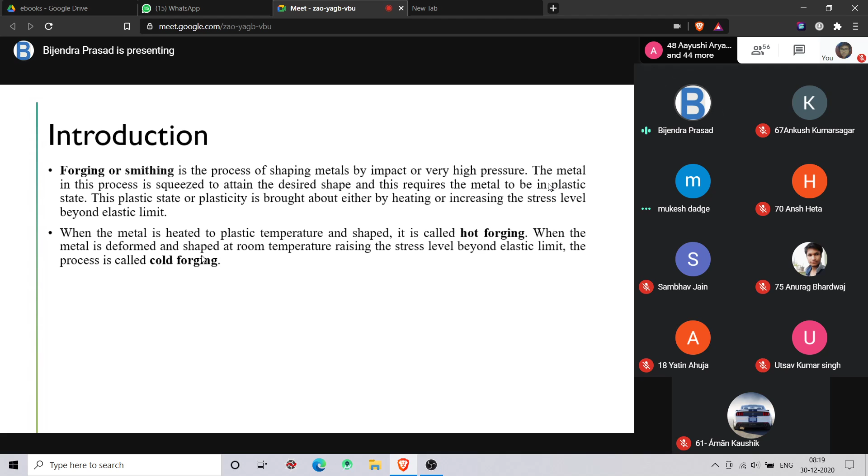Cold forging is used for very soft materials like aluminium, or when we want to do very little amount of deformation, then cold forging is applied.

Now this is the main classification of forging. One is open die forging, and the other is closed die or impression forging, also known as impression forging.

As you can see in these two images, these are examples of open die forging. These metallic parts, the lower and upper, are the dies. So these two metallic parts are known as die, used to give a desired shape.

We apply pressure as well as give the shape. So in this open die forging, the die is actually open, with two flat parallel faces, and between those faces the object is placed and pressure applied to give the desired shape. The material is free to flow in any direction - that is the main property of open die forging.

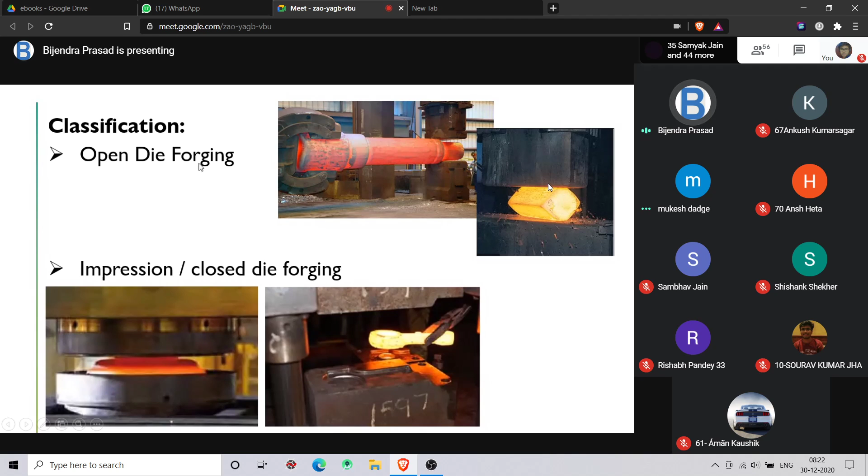So open die forging is performed between two flat dies, like I showed previously, and there is no pre-cut profile, no predetermined shape. The material is free to flow in all directions when you compress it in thickness or width.

Here the parts are of very large size, in weight as well as length - you can see 200,000 pounds and 80 feet in length. It can be hammered or pressed into shape. As the size is very large, the components produced will be less, and it is used where the size of the component is too large.

This is the schematic diagram. You can see the upper die, the lower die, pressure applied from above, and this is the billet - the heated raw material known as billet, which is pressed to get the final shape.

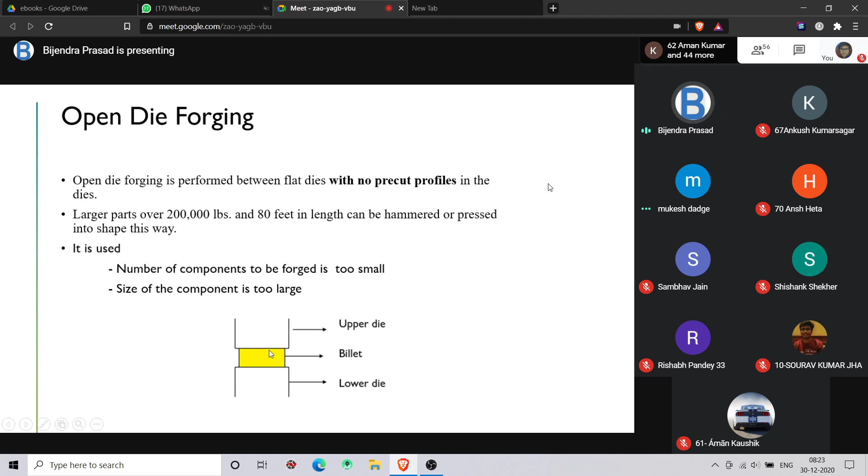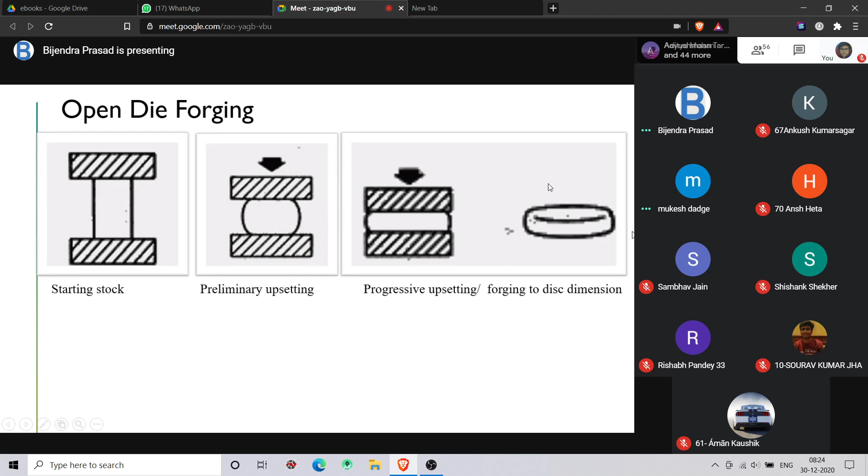This diagram shows the complete process. Initially the starting stock was cylindrical, placed between the upper die and lower die. When pressure is applied, this is the preliminary upsetting process - we will learn about upsetting in coming slides. With progressive upsetting, the final dimension is achieved as the final product.

Now, impression or closed die forging - as already shown in the images, it contains a pre-cut profile of the desired part, and has very close tolerances. You can achieve required dimensions compared to open die forging, where material flows freely in all dimensions. Here the flow is restricted up to a certain limit, so you can achieve very accurate or precise dimensional accuracy.

Now, because this is a closed die, size is restricted. Very large sizes cannot be used here. Only up to 60,000 pounds is used right now.

In impression die forging, two dies are brought together with the workpiece which undergoes plastic deformation. This is a very important point - all the deformation that is occurring is in the plastic state of the material, not in the elastic range.

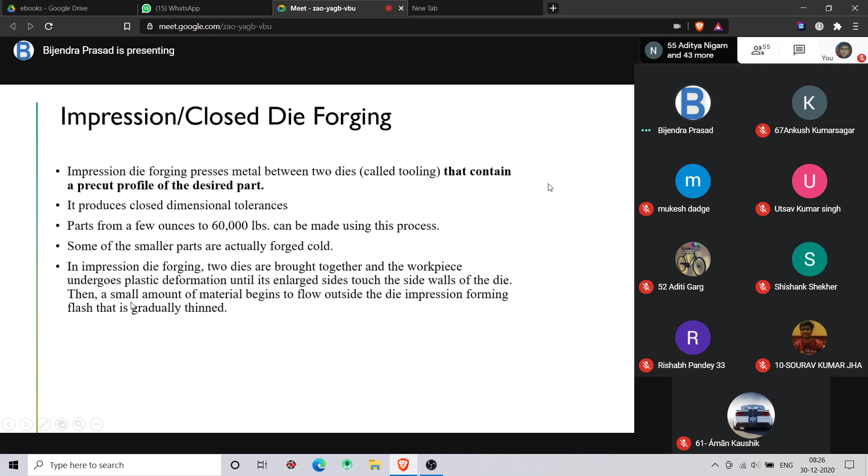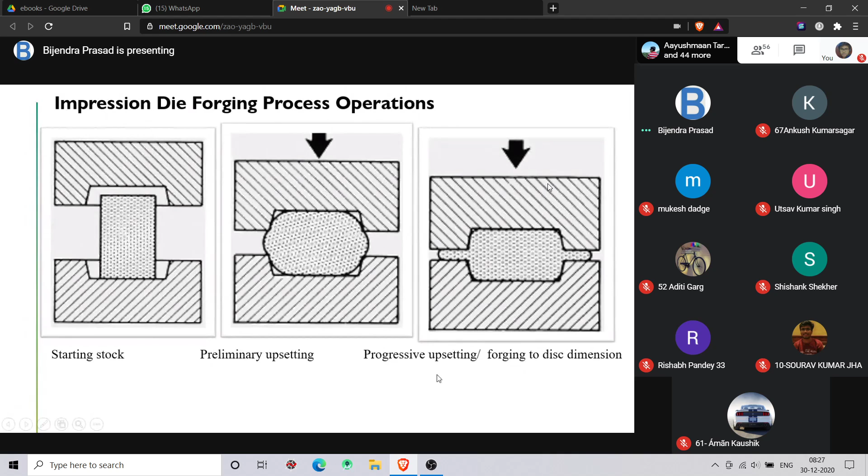Now, what materials do we use in forging? To learn about forging materials, we should know about forgeability - the ability of a material to get forged. Every material cannot be forged; not all metals are forgeable. So what property decides that a material can be forged? It is the ductility of the material.

What is the opposite of ductility? Brittleness. So ductility is a property where a material can be made to stretch without breaking, up to a certain limit.

Where ductility is high, ductility and forgeability are directly related - forgeability will increase as ductility increases with temperature, up to the point at which a second phase appears. After that critical temperature, the microstructure changes, so we won't go into that deep.

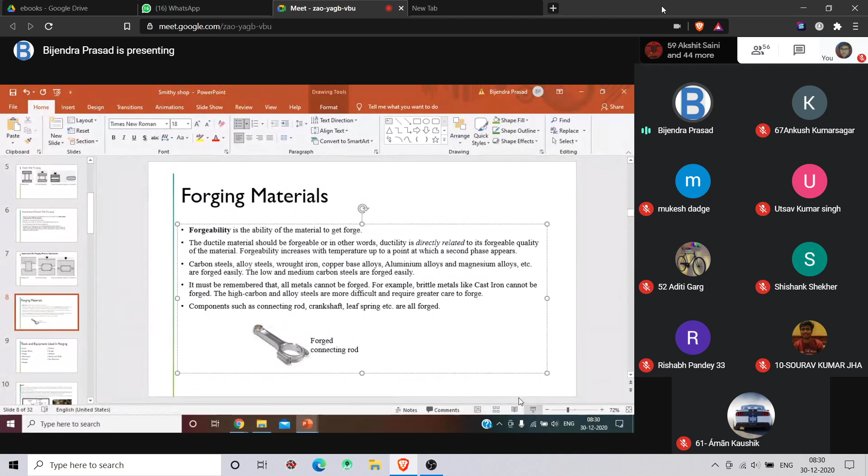These are the metals that can be very easily forged - carbon steels, alloys. You must remember 2 or 3 names from this for Viva purposes. Not all metals can be forged; brittle metals like cast iron cannot be forged because it will break when hammered. Forging is a process where you continuously need to hammer or apply pressure using mechanical presses.

High carbon steels and alloy steels are also brittle in nature and very difficult to forge. Low and medium carbon steels, where carbon content is low, are easy to forge, but at high carbon stages it becomes difficult.

Various components produced in industries include the connecting rod, used in IC engines to transmit power from the piston to the crankshaft, which is finally connected to the wheels. Then there's the crankshaft, another part used in automobiles, and the leaf spring.

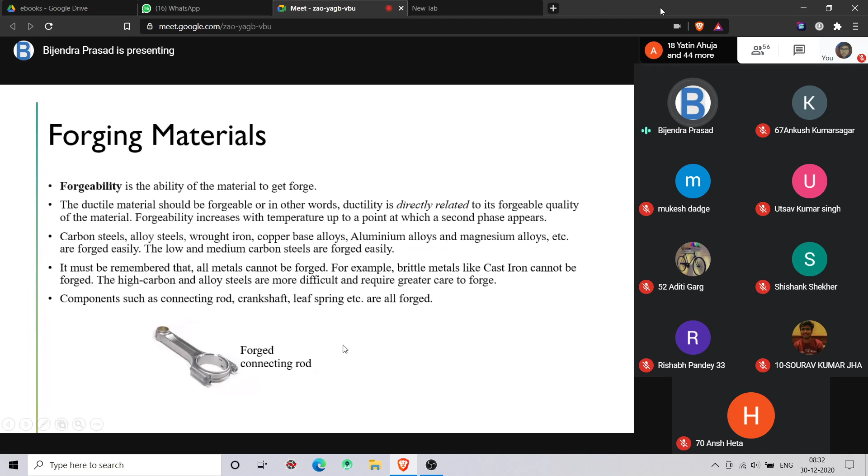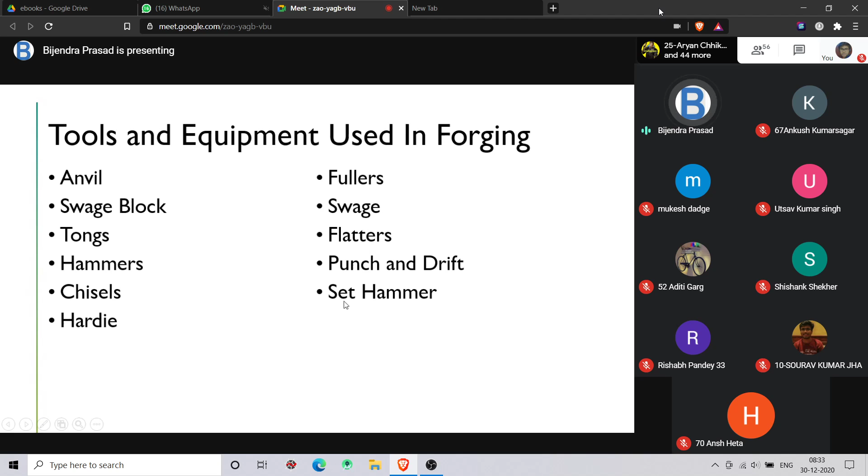Now we will discuss the various tools and equipment that we use in forging, like anvil, swage block, tongs, hammers, chisels, hardie, fullers, swage, flatters, punch and drift, and set hammers. So we'll go through all of these one by one.

So anvil is a tool you must have seen at various places where blacksmiths use this very commonly. So the front part of this anvil, this is actually a supporting device. When you are hammering, you use this as the supporting tool.

There are also some provisions in this anvil which may help you in deforming the material into a very specific shape. There is a square hole known as the hardie hole, and this is a square hole. This is a pritchel, which is a circular hole, and then you have this beak or horn where you can shape the circular curvature. Various operations that we perform are performed on the anvil.

It is made of wrought iron or mild steel. This material is made of mild steel or wrought iron. Now a tool steel plate is welded on top of the body to protect it, basically from the hammering process.

Now the front portion is known as the horn or beak. It is used for bending or forming curved shapes where we need to curve. Suppose if we wanted to bend this rod, we would place it here, and then apply pressure. It will bend.

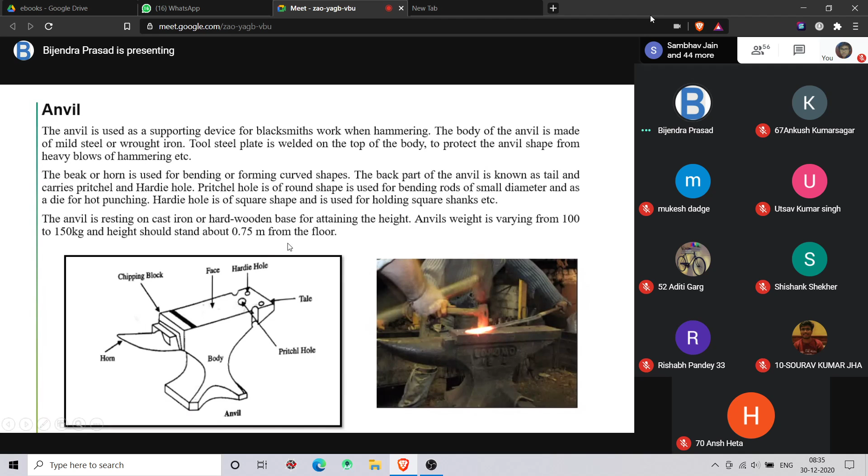Another tool that we use is the swage block. Swage block is generally made of cast iron, and it has, you can see, predetermined shapes like square, rectangle, circular, half round grooves, maybe roofed or some trapezoidal like shapes. These are all used to give some specific shape to our raw material. Suppose you want to give a proper circular shape, you can place it, rotate it, and apply pressure. Or if you want to give some shape like a flat shape, or a trapezoidal shape, you can use it there.

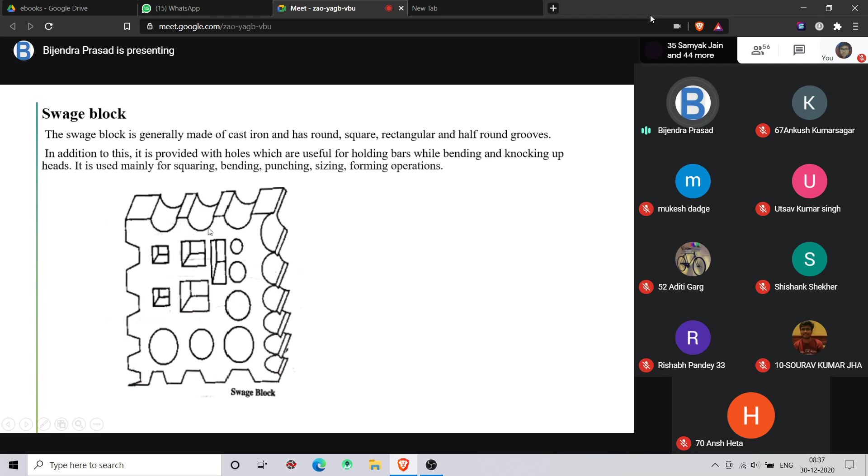So swage block is useful for holding bars while bending and knocking up heads, like when you are preparing nails and need to knock up the heads. It is used mainly for squaring - when you want to make the cross section square, for bending, punching operations, sizing, or any forming operations. So swage block is very useful in that case.

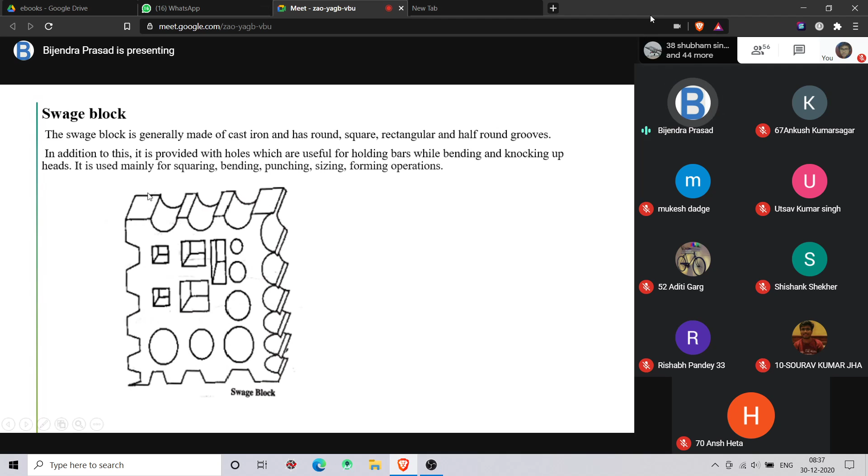Now tongs. Tongs is a very important tool that we use because it is used for gripping and holding material which is at very high temperatures - we cannot hold it directly with hand, obviously. Even when using it at cold temperatures, we need to use tongs, because a very huge pressure is applied while hammering. So to make it stable and give proper gripping, we use various types of tongs.

Now, on the basis of application, various types of tongs are used. As you can see here, this is a flat tong. Flat tong is used where we use flat plates, flat objects, which are not very large in size, but small, not very thick and not very huge in length. This is used flat tong.

Now flat mouth tong is used for longer flat objects. This is also known as two-sided supporting tong, because one support is getting from here and another from this end. So it's two-sided support of flat mouth tong.

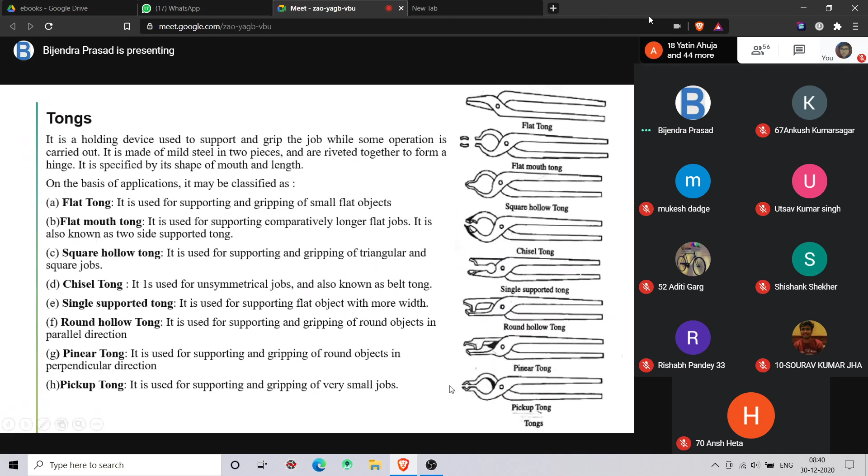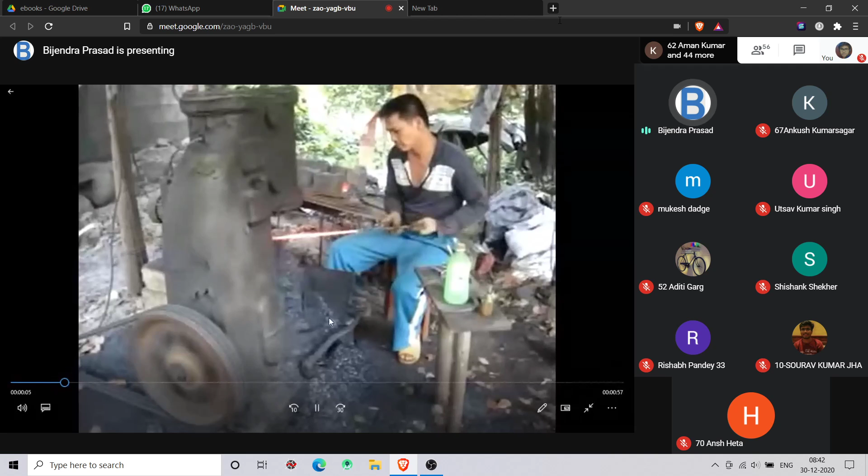This is power hammer. You can see in this video. Now this person is producing a boat nail made from this rod. Now you can see this is a hammer.

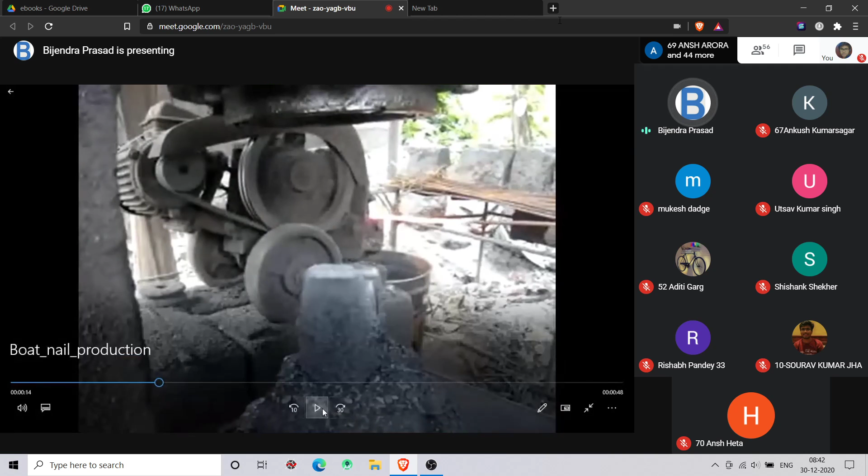Is this video? You can see this video. Yes, sir. Yes, sir. Yes, sir. Yes, sir. Okay.

Now this should not be misunderstood as the press, because press applies continuous pressure, but this is intermittent pressure, like hammering. This is a hammering process. This is a power hammer. Don't get confused with the presses.

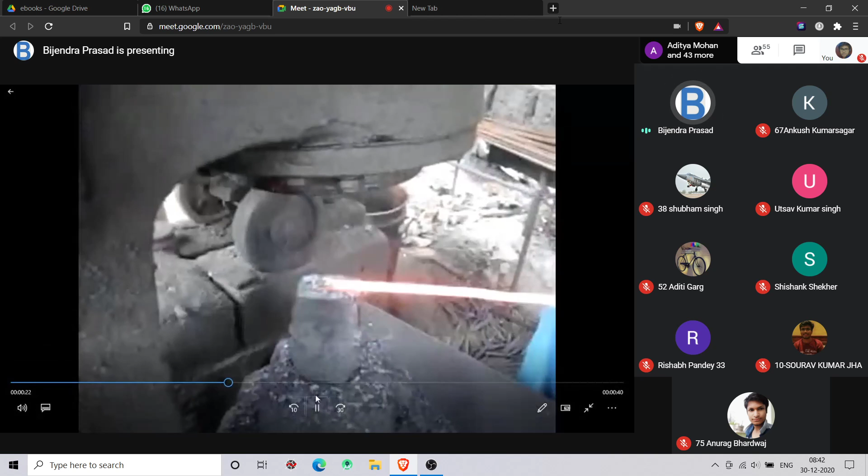Electric power is used to move these electric power hammers. So this is actually he is using it to make some nails out of this.

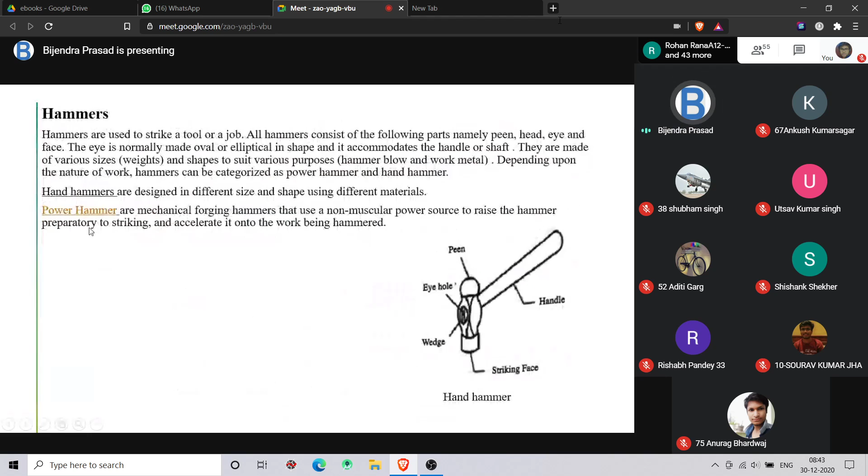So there are various types of hammers used according to the shapes, and they have different applications. One is called ball peen hammer, where the peen is of round shape at one end, and the other we have the flat surface. This is used basically for riveting purpose or chipping purpose, and the weight is generally 100 to 900 grams.

Then we have cross peen hammer and straight peen hammer. Here you can see the cross peen is perpendicular to the direction of the handle; this end is perpendicular to the face of the handle. Then in the straight peen hammer, it is parallel to the face of the handle. The handle will be placed in this direction, and it is parallel to this. And here the peen is also flat in nature, not circular, not round.

So now where is it used? It is used in stretching and bending operations, and it is of 200 to 900 grams. And in straight peen, it is also used for stretching and peening purposes.

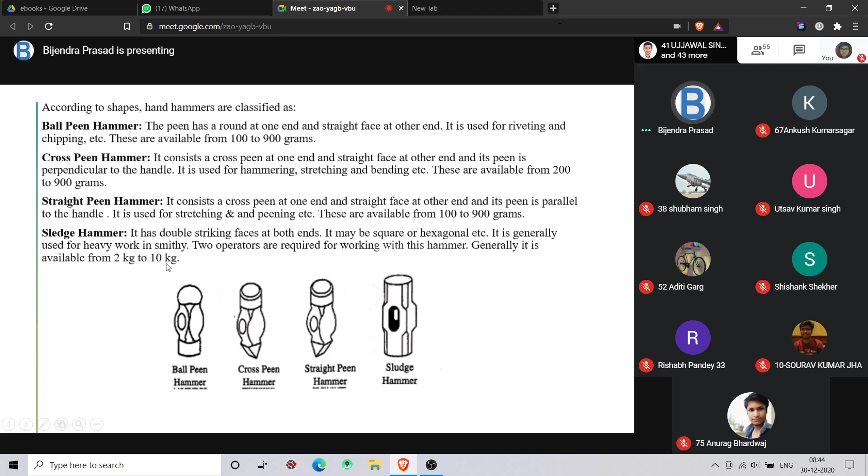Now sledgehammer, here both the surfaces are striking faces, both are parallel, and it is used for heavy work. The weight is also very high, 2 kg to 10 kg weights are used in the sledgehammer.

The next tool is the chisel. Chisels are used for cutting purposes. You must have seen chisels used at homes, and also during construction work. Chisels are used to cut metals or other materials.

According to temperature requirements, two types of chisels are used: hot chisel and cold chisel. The difference lies in the angle made by the two faces of the chisel - 30 degrees in the hot chisel and 60 degrees in the cold chisel.

It is used with a handle, or we can use a steel clamp or rod. It is made of medium carbon steel or high carbon steel, with the angle kept at 30 degrees in the hot chisel. The hot chisel is used where metal is in its plastic stage, meaning at higher temperature.

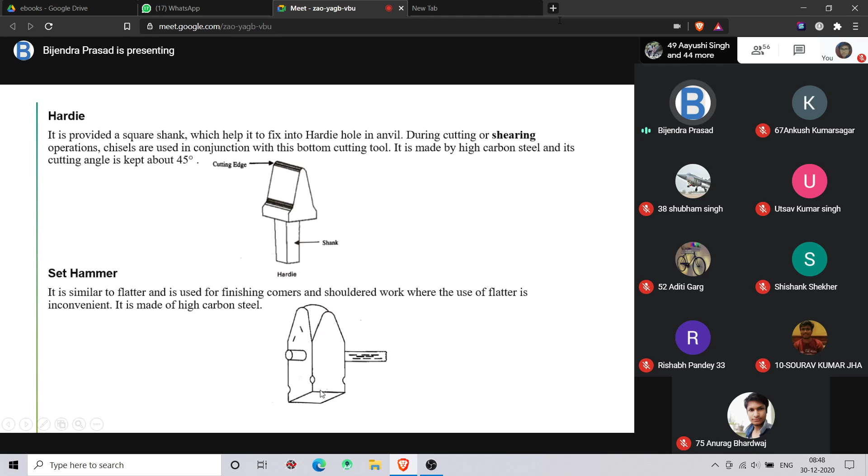Set hammers are basically not very large in shape. For larger areas we use flatters, but at the corners and places where the flatter cannot reach, we use set hammers to give finishing to the surface of the product.

Then we have fullers. Fullers are used to neck down the cross section at a particular location. Suppose there's a large raw material, but at a particular length we want the cross section to be necked down - it should be reduced. So we can use this fuller for that.

The bottom portion of the fuller is put in the Hardie hole of the anvil, and the upper portion is used with a rod or wooden handle. The material is placed in between, and we apply pressure, reducing the size at that particular part to the required dimension. So remember, fullers are used for necking down or reducing the cross section of the job.

Then the swage. Earlier we discussed the swage block, but this is swage - they must not be confused. Swage is just like the fuller.

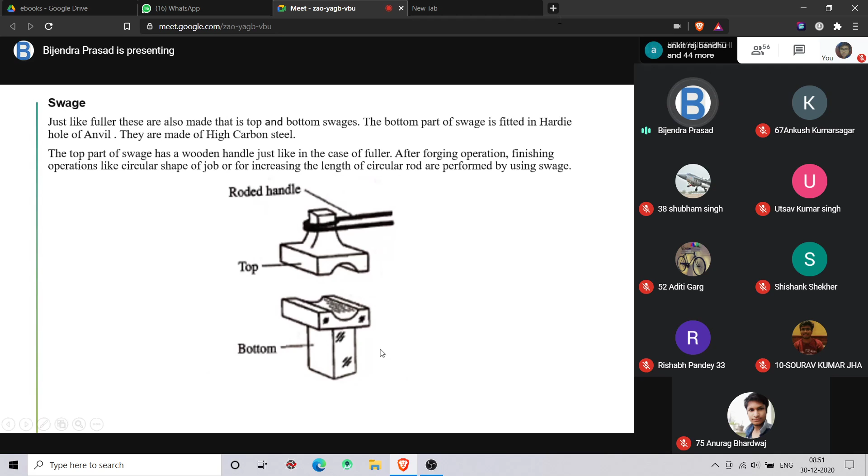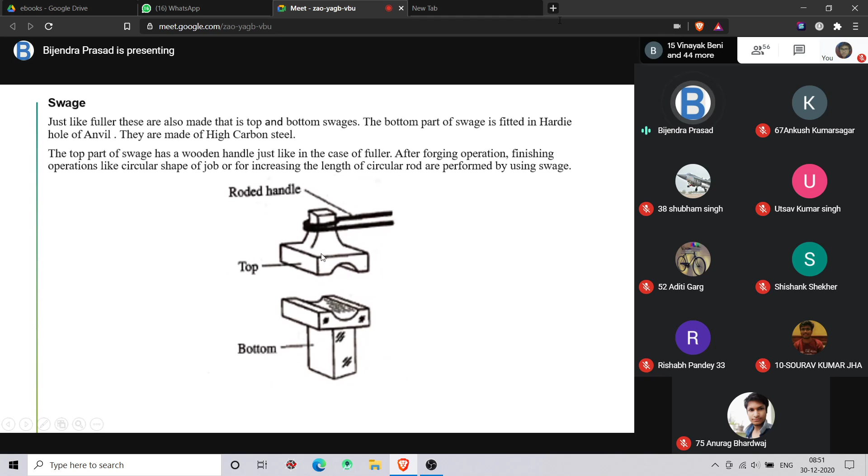So swage is used to decrease the diameter, and at the same time it will increase the length - at the cost of the diameter, the length increases. This is the swage operation performed using the swage tool. Again, like the fuller, the lower bottom portion is fixed in the Hardie hole of the anvil, and through hand muscle power we apply pressure using the top portion of the swage.

Now flatter is same as the set hammer, but is of higher area - you can see the area is very large. This can be used in a large portion to smooth the surface after the shape is given. After the complete shape is given to our product, we use flatters to give smoothness to the surface.

It is made of high carbon steel and well hardened. Hardening is very important because when you apply pressure, it is possible that the tool might get some cracks, or the surface itself can get scratched or deformed. Then it will not be able to give a smooth surface. So the surface of this tool must be hardened enough to give the required smoothness.

Then punch and drift. Punch is a very common tool used to produce holes in the object. When temperature is raised, we put the punch and apply pressure from above, creating a hole of a particular dimension. Drift is the next part after the process of punching. Drift is more precise, giving higher tolerances and more accurate dimensions to the hole produced earlier by punch. So drift is actually used to give accurate dimensions to the hole, or to improve its quality and make it more circular in nature.

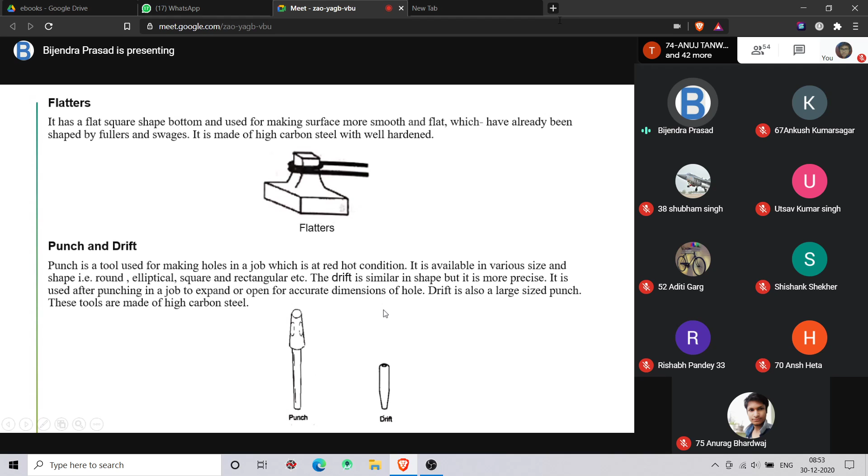So we are done with the tools we have used. Now an important aspect in forging or smithing is the heating devices that we use, because heating of the material is very important here, and knowing the various types of heating processes is also important.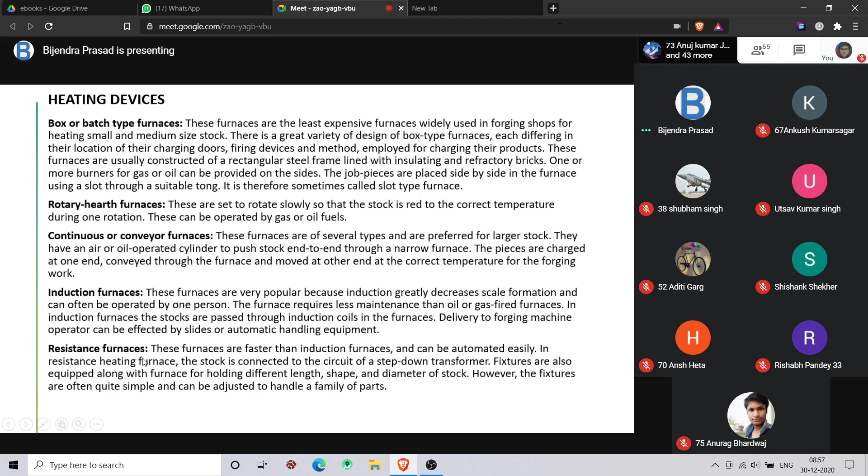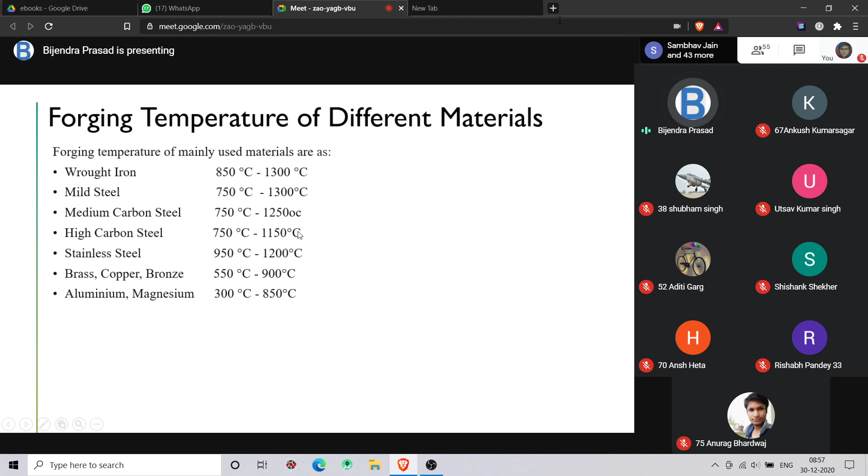Yes, forging was the first process that was used for welding. Earlier there were no welding processes like the ones we use nowadays. Forging was the only process, even 150 years back, that was used for welding.

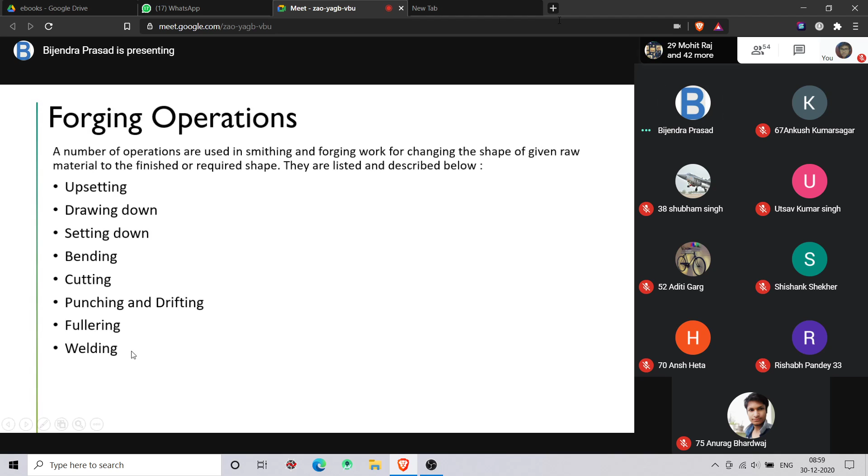So we'll go one by one through all the processes. Upsetting process: upsetting is the process where we increase the thickness of the material, increasing the thickness or cross section of the material at the expense of the length.

Length is reduced, we apply pressure longitudinally, and we increase the thickness of the material. This process is known as upsetting. Wherever we increase the thickness, this is the upsetting process, also known as jumping.

The metal is heated up to a plastic state, and then we apply pressure using the hammer. After we support the material, the metal tends to increase in its dimension at 90 degrees to the direction of application of force. If the force is applied in the negative y direction, the deformation we get is in the perpendicular x direction. So there is a 90 degree relation between the force and the increase in dimension.

Upsetting process can be of 4 types, done in 4 different ways. One is when upsetting is done to the entire depth of the material, entire thickness. So throughout the depth the thickness has increased.

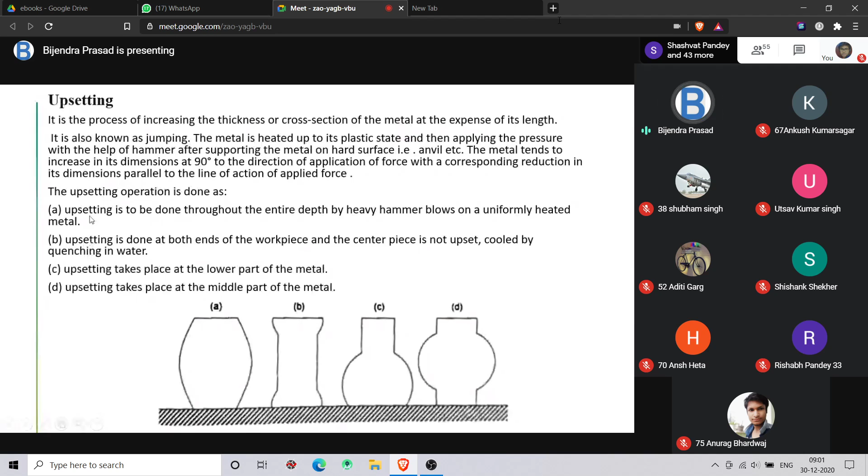Then drawing down. Drawing down is the opposite of upsetting. Here the length is increased, but the thickness or width is decreased. Earlier the width or thickness was increased, but here the width decreases and the length increases at the expense of its thickness or width.

It is also known as the swaging process. Upsetting was known as the jumping process, and drawing down is known as the swaging process. It is exactly the reverse of upsetting.

If this was the original metal, then using hammering, we increase the length, and then we use the flatter, because after giving this desired shape, we need to improve the surface quality. So we use the flatter to improve the surface quality. This is the drawing down operation.

Here we decrease the thickness of the material. So what discriminates between these processes: in upsetting, we increase the thickness at the expense of length, whereas in drawing down we decrease the thickness and increase the length.

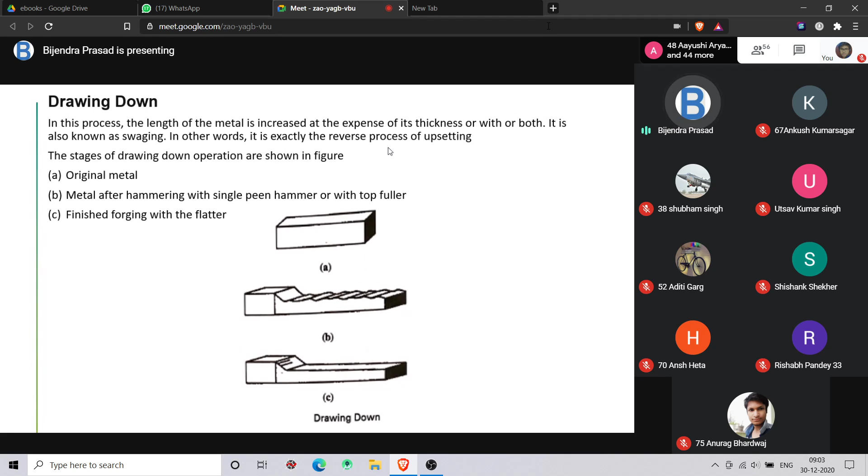Now, setting down is very simple, similar to the drawing down operation, but it is localized. Suppose we want to do it at a particular location or point, then that drawing down is called setting down. Suppose at the corners we want to do it only at a particular point, then it is known as the setting down process.

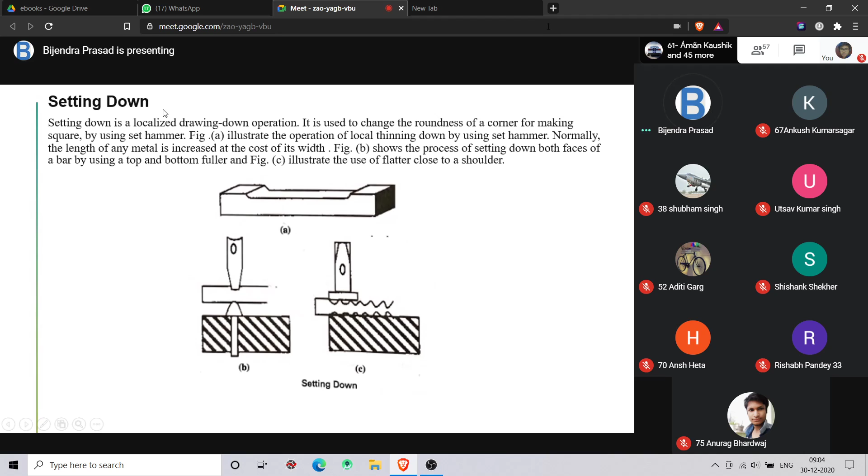Now bending is also a very important part of this operation. Bending is very prominently used in various types of metals to give a curvilinear shape or angular shape. Two important shapes given are curvilinear or angular, with a sharp angle used for the angular type.

Now for curvilinear bending, what we do is place the material on the horn or beak of the anvil, or the front part of the anvil. We place it there and apply pressure, following these steps: put the metal on the anvil, start applying pressure, and finally we bend it.

So bending operation can be classified as curvilinear and angular. Bars and flats are bent into the required shape using bending operation. Bending is done on the anvil face, over the anvil horn, or on the front part of the anvil, also known as the front face.

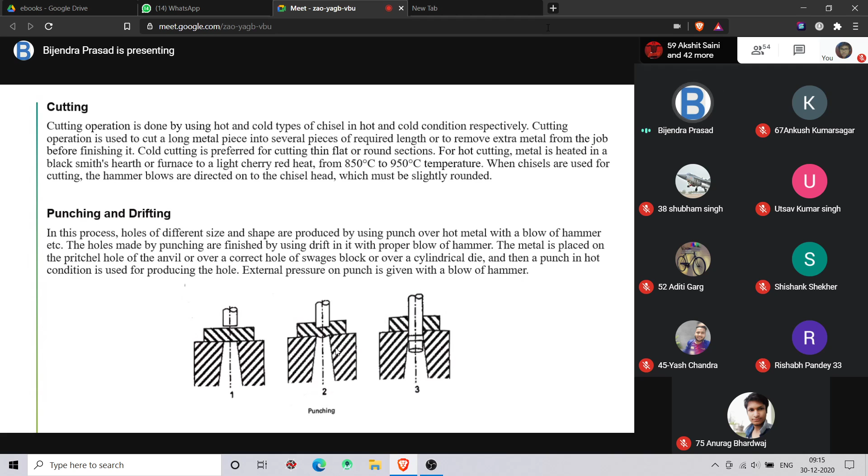Then fullering. For fullering we use the fuller tool, as I discussed before. Do you remember what the fuller tool is?

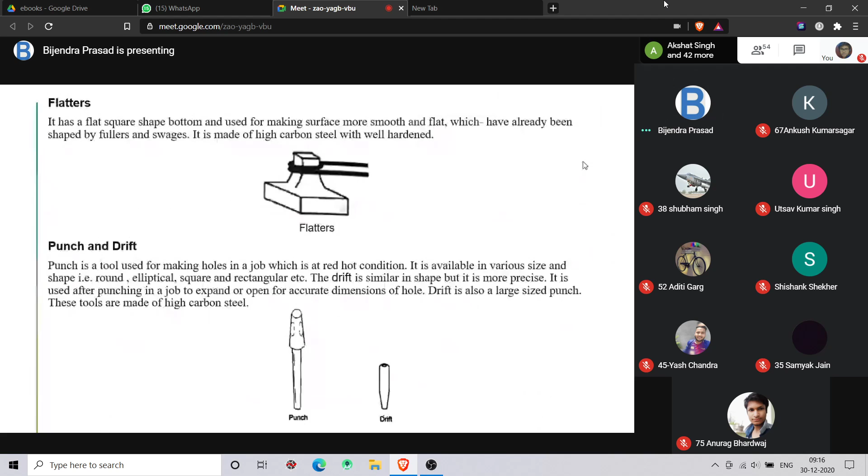These are fullers, this is a set, a set of two tools. One is placed in the anvil, in the hardy hole of the anvil, and the other we use manually with the hand. We apply pressure, and it is used for necking down the object at a particular location.

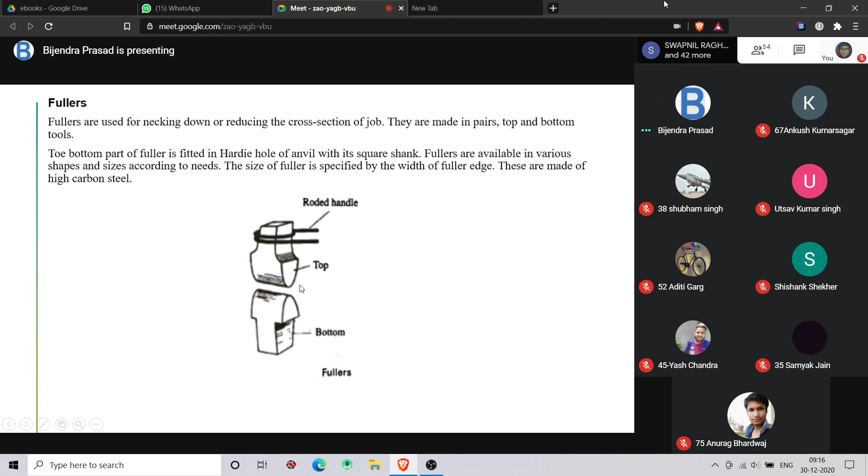So this operation is known as the fullering process. The length of the workpiece is increased, following volume constancy, because the volume remains constant. So if the diameter or thickness is decreased, the length will increase at the cost of the width. It is also known as the drawing process, because the length is increased.

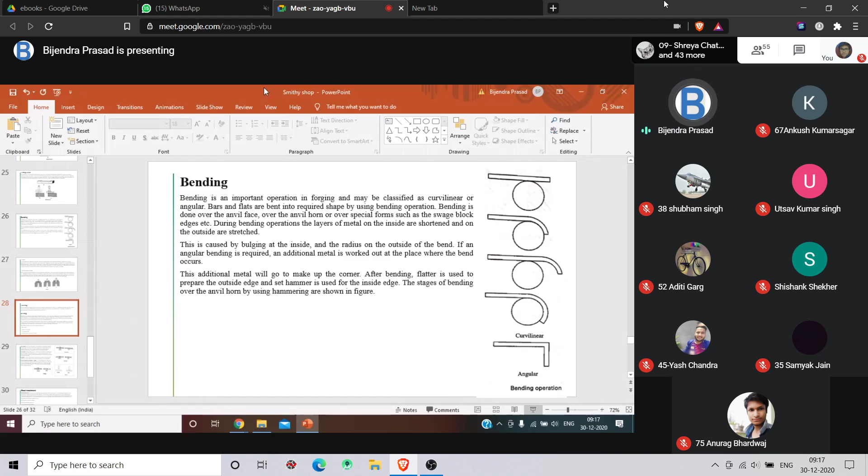So the fuller set is used in this process. Hot metal is placed over the bottom set of the fuller, which is placed on the hardy hole of the anvil, and the hammer blows are directly provided on the metal or the top surface of the fuller.

Next operation that we perform in forging is welding. We can weld metal through forging by directly applying pressure to the metal. If we put two metals one above the other, both heated to a particular temperature, and apply pressure, a mechanical joining process occurs at the microstructure or micro level.

And the objects are actually welded. So two pieces of the same metal are heated and joined together with external pressure, so they may act as a single piece. The metal pieces are heated in the smith's hearth or furnace to the welding temperature, then withdrawn from the furnace and joined together by application of external pressure through hammering.

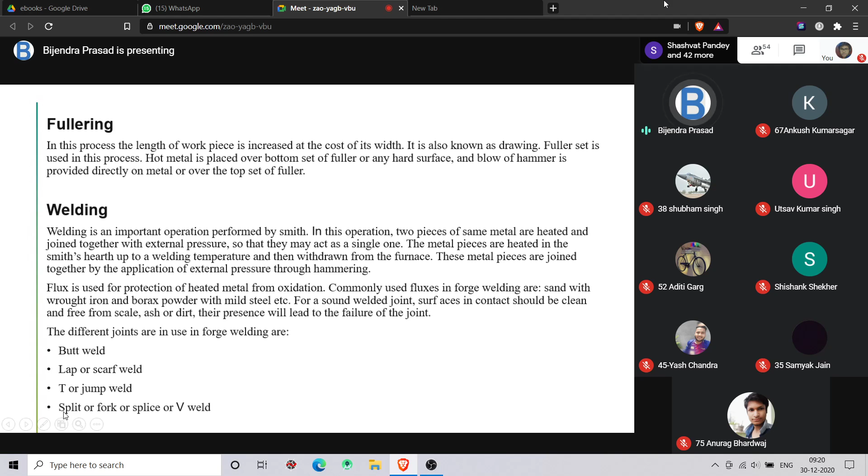So four different types of welding joints are used: butt weld, lap weld, T-weld, and split or V-weld joints. These represent different positions at which the material can be placed.

Butt weld is a very common type of welding edge. These are known as edge preparations - how the edge is prepared to weld. The process is very similar in all these welding processes; only the edge preparation is different. In butt welding, the metal pieces are joined end to end. When we apply pressure, the thickness increases, and finally it joins. Then we hammer and level out the thickness of the material.

Next is lap weld. Here an angle is given between the surfaces rather than perpendicular - an inclined direction. The welding is done in this inclined direction, joining the faces of both pieces. We apply pressure from both sides, placing it from below, and the joining process is done. So the welding joint is in the inclined direction.

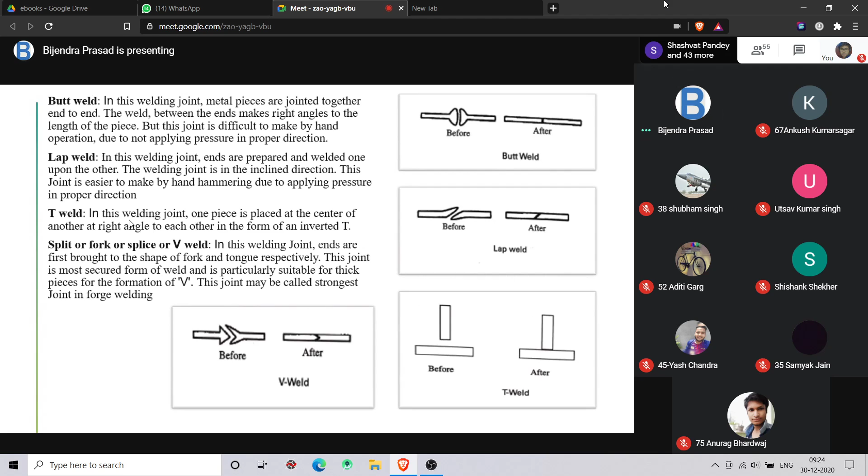So these were some of the processes used in forging. Now the next step after forging is done: when we start with forging, we heat the material first, then take it to the anvil and form it into any desired shape. After a particular shape is achieved, we use some flattening tools to smooth the surface, and after this we do heat treatment of the object.

Why is heat treatment done? Because in forging, continuous hammering of the metal is done, and this tends to create internal stresses that are withheld within the surface. So to remove this internal stress, we need the material to undergo heat treatment, because otherwise the metal would be more brittle - not completely brittle, but to a certain degree the strength would not be there. The strength will be there, but it might fail very quickly. So to remove these internal stresses and improve various microstructure properties, we do heat treatment after all the process has been done.

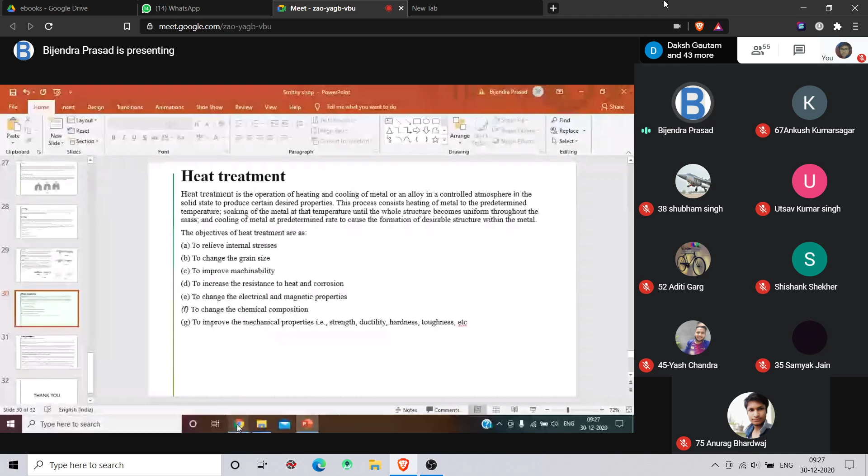Yes, anybody? Can you hear me? Yes sir. So what is the difference between quenching and annealing? Sir, what is quenching and annealing? Sir, in quenching - with respect to annealing, annealing is done at a higher temperature. Okay. Quenching...

So quenching means heat treating the object and then putting it into oil.

Okay, oil or water - the cooling rate is fast. What happens when we put it in water? The cooling rate is so fast that in a matter of seconds, the metal will cool from even 1000 degrees Celsius to room temperature. But in annealing, the cooling rate is not so high. So in both cases, same material, same process, but one uses water and one uses normal cooling, so the end product will be different.

So heat treatment gives different products. Various types of heat treatment exist, but the objectives are to relieve internal stresses, to change the grain size - these are all microstructure changes - to improve machinability, increase resistance to heat and corrosion, improve corrosion properties, electrical and magnetic properties, chemical properties, mechanical properties. All these increase and improve: strength, ductility, hardness.

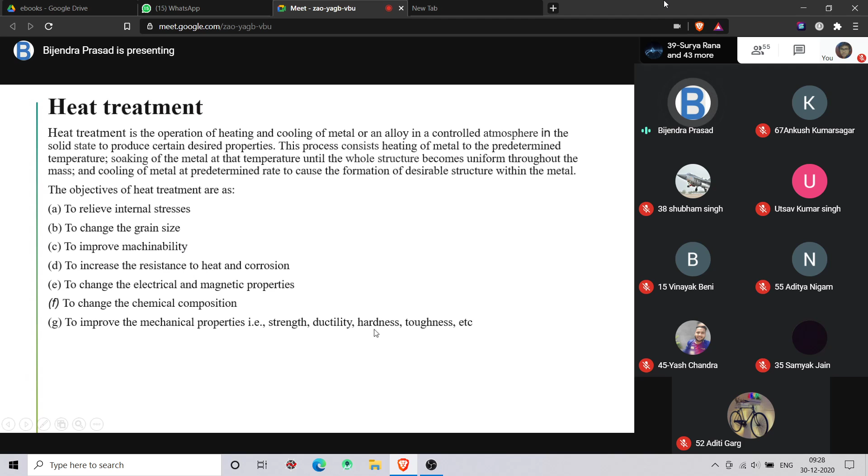Various types of processes of heat treatment used in industries include annealing, normalizing, hardening, tempering, and case hardening.

Annealing is done when the material is heated to a critical temperature and then allowed to cool slowly - it may take 4 or 5 hours to cool. The purpose is to relieve internal stresses, refine the grain size, and make the metal soft.

Another process is normalizing - remember these names. Normalizing involves heating the material to a critical temperature, 50 degrees above the critical temperature, which you will study in detail with the microstructure, for a given period of time. The important part is it is cooled in air. This is again to remove internal stresses and refine the steel.

In hardening, we again take it up to 30 to 50 degrees above critical temperature, but here we cool it suddenly. In normalizing it was cooled in air, but in hardening it is cooled suddenly in liquid - we put it in liquid, so the surface gets hardened. We suddenly cool it; this process is also known as quenching.

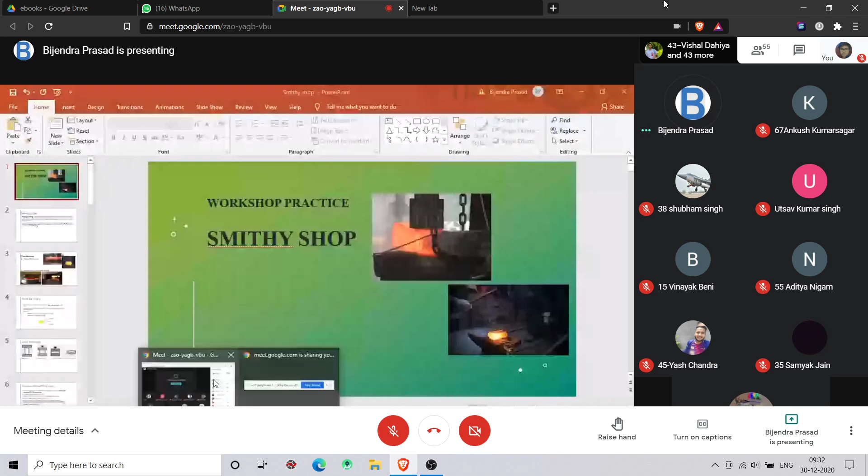Any queries from today's class? No sir. Okay.